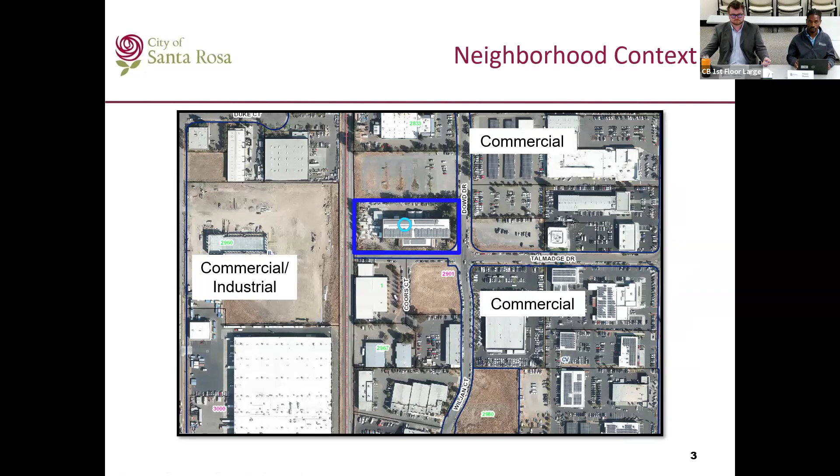Here's an aerial view of where the project will be located, and the blue box indicates where the project is. Surrounding the project is mostly commercial uses, and to the west, an industrial use. The general plan land use designation is light industry, intended for manufacturing and industrial uses, and this is consistent with the zoning land use designation of light industry, which implements the zoning district for the general plan.

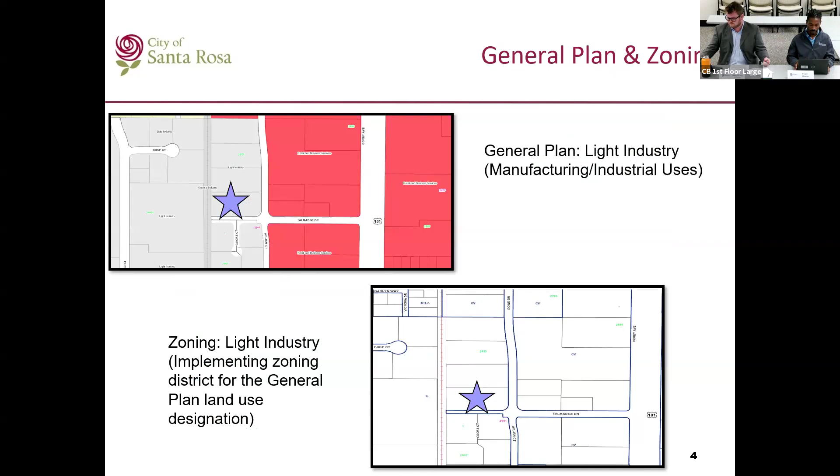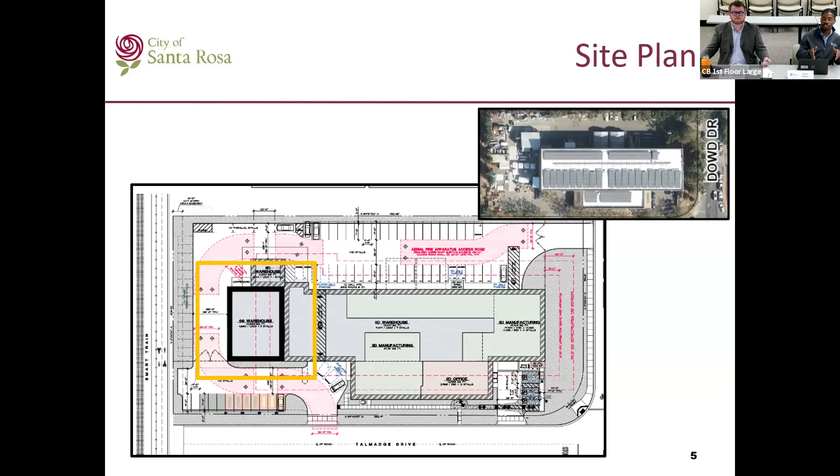Here's the site plan of the site, and to your top right is an aerial view. The addition is going to go to the left side of the building. If you look at the middle of the screen, the yellow box indicates where the addition is going to be added. This is at the rear of the facility, the elevation closest to the SMART tracks. Here are the north, south, west, and east elevations of the project, and the yellow lines indicate where the addition is going to be. The addition will match the existing colors of the existing facility.

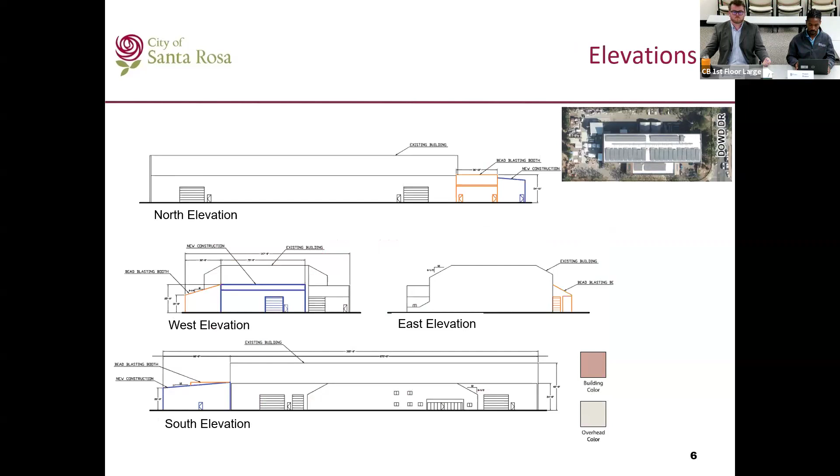This project has been reviewed in compliance with the California Environmental Quality Act and is categorically exempt because it involves minor modifications to an existing facility. At this time, there are no unresolved issues, and no public comments have been received. Staff analysis has concluded that all findings can be met, and the applicant has reviewed and accepted all conditions of approval.

Thus, it is recommended by the Planning and Economic Development Department that the zoning administrator approve a design review to allow an addition at 2899 Dowd Drive. My contact information is at the bottom left of the screen if you have any questions.

Thank you. Questions or concerns? Is the applicant present, and if so, do they wish to make any comments or presentation? The applicant is present, along with the CEO, CFO, and COO of Blendtec. We just want to acknowledge that the process has meticulously been conducted by the city planner, and he's been very express and clear on the steps to be taken. We're delighted to do them, so we're ready to proceed.

Great, thank you. With that, I'll open the public comment. If you're attending in person and would like to make a public comment on this item, please raise your hand. Zoning administrator, there are no public comments.

Great, thank you. Thank you for being here, and thank you to the planner for the presentation. The design looks good. It seems like a relatively straightforward expansion of an existing use, using existing materials and colors compatible with the industrial area. So I'll approve the project.

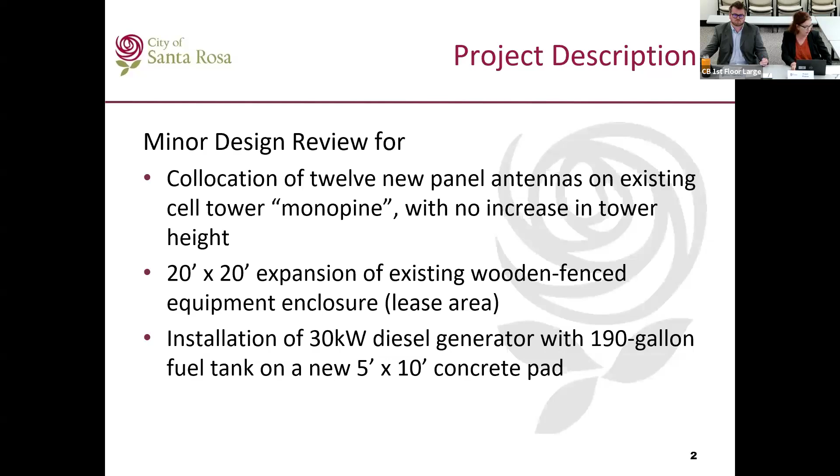So for the general plan and zoning, the site is in blue with the star. The zoning and general plan land use designation is public institutional. This allows for the clustering of public facilities such as hospitals, schools, or in this case, the Sonoma County Fairgrounds. The general plan land use designation is consistent with the zoning designation.

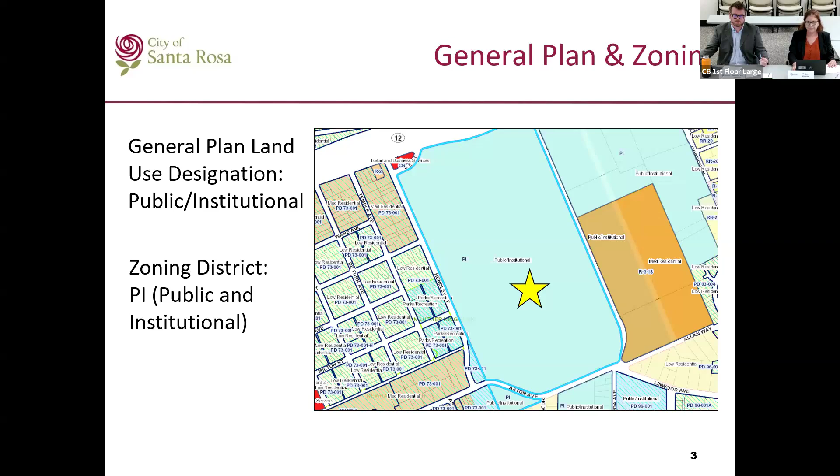Here is the fairground site. This particular parcel is 81 acres. It's bordered to the north by Highway 12 and Bennett Valley Road. To the west, it's existing low and medium density residential as well as Martin Luther King Park. To the south, you have additional parking, some other Sonoma County owned facilities, and a sliver of medium residential development. To the east, you have additional overflow, more Sonoma County facilities. Where the yellow star is on the south there, that's where the project site is. It's really south, southeast.

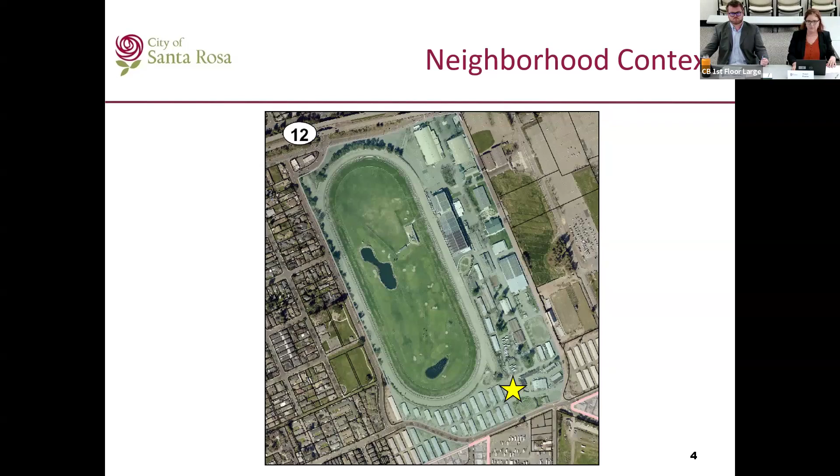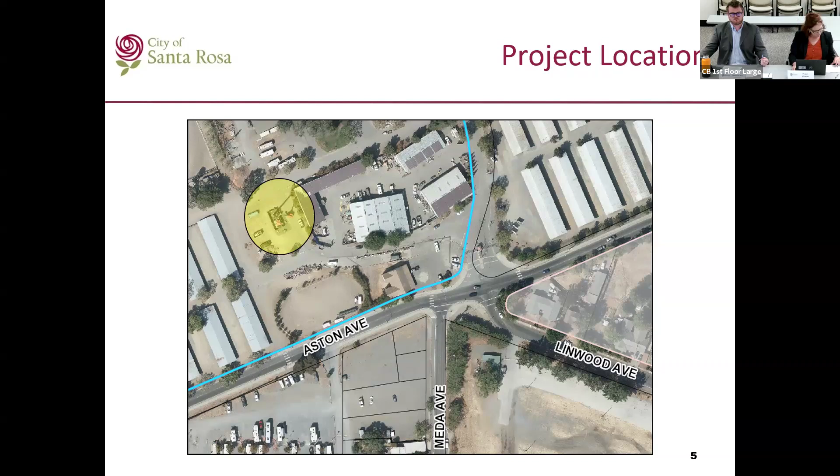Here's a further zoom in showing the existing cell tower, which has 800 square feet of lease area and a 75 foot monopine. It's served by existing roads and utilities.

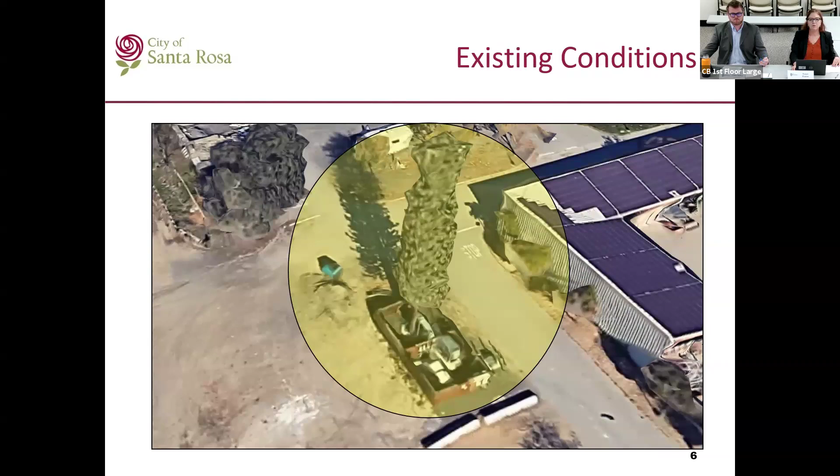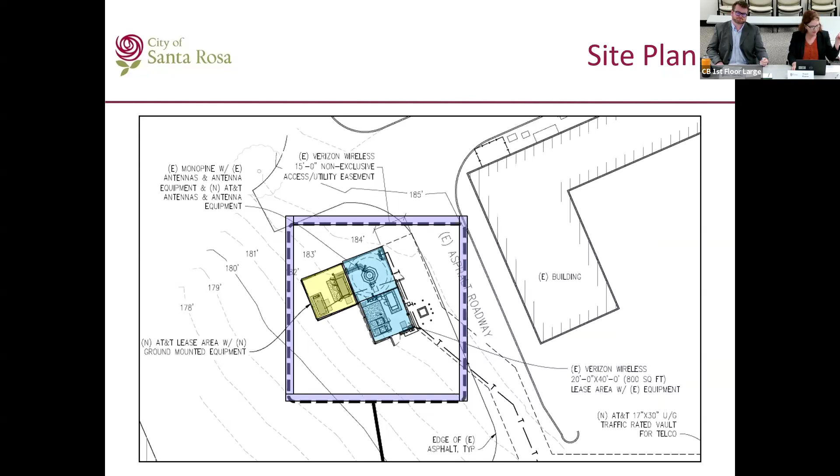Okay, so this is the site plan. I'll use colors here for you guys. Blue is the current lease area, which is 800 square feet. The second square is the cell phone tower area with the 75-foot monopine. In yellow is what's proposed, this expansion. The new lease area will match the existing 6-foot wooden fence with an additional 2-foot lattice, which shields it from public view.

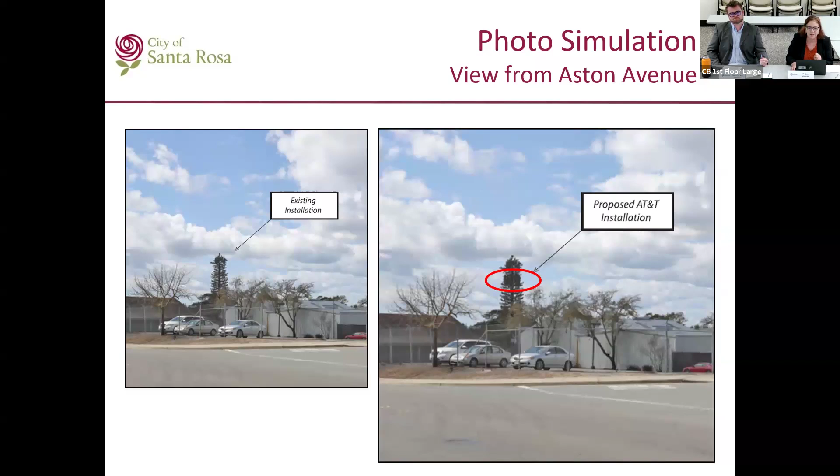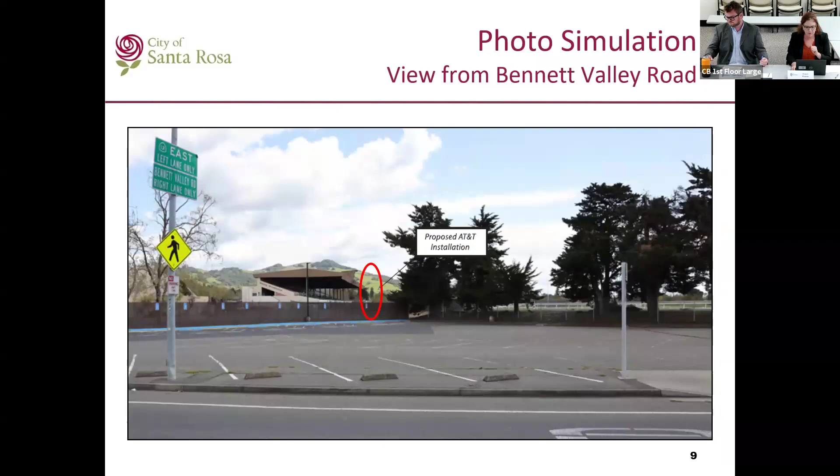Again, this is looking from Bennett Valley Road, and the circle shows you can just make out the cell phone tower, that's where the installation is. Again, this is the existing cell phone tower.

Environmental review: the project has been reviewed in compliance with the California Environmental Quality Act (CEQA). It is categorically exempt because it involves minor changes to an existing structure, and statutorily exempt because it's consistent with the general plan.

There are no unresolved issues as a result of staff review. At the time of this presentation, I had not received public comments, but I have subsequently received three: one phone call and two emails, and I'd like to address those.

I addressed them with the commenters via email as well as on the phone. The comments were regarding concerns about RF emissions in relation to the nearby horse stables, as well as concerns about impacts to the nearby residences.

I spoke with the applicant, who responded that per the electromagnetic energy compliance report included in this application packet, the maximum average RF at this site is 8.68%. This is compliant with FCC regulations for maximum permissible exposure limits.

The mitigation measure required here is that a caution sign be posted at the base of the pole, which the applicant confirms will be implemented. Additionally, the standards are for humans, but that does cover mammals as well. The applicant is also here if there are further questions on this subject.

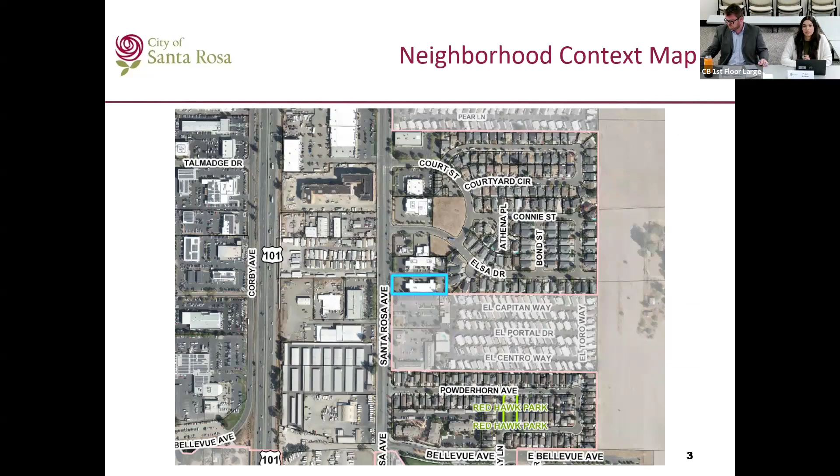Here is a neighborhood context map, so you can see the location. The project is located towards the south end of the city on Santa Rosa Avenue.

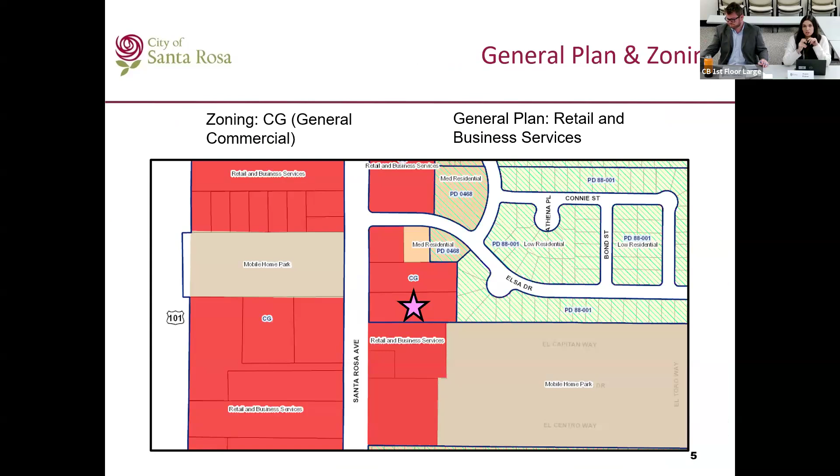The general plan land use designation is retail and business services, and the zoning district is CG, or general commercial.

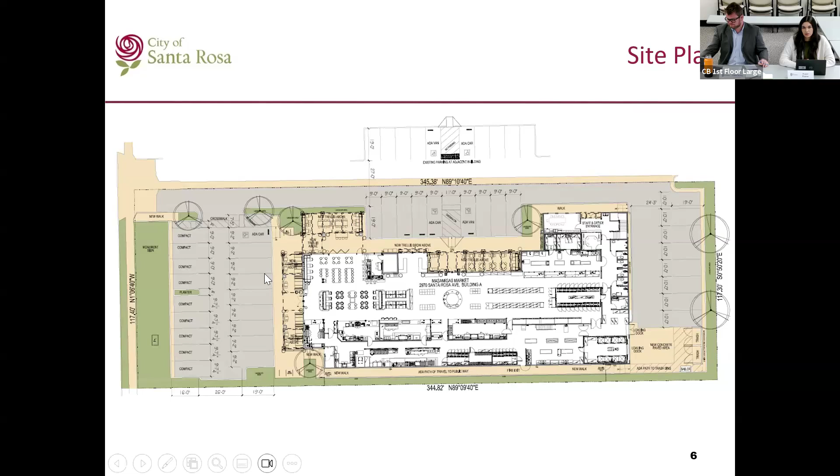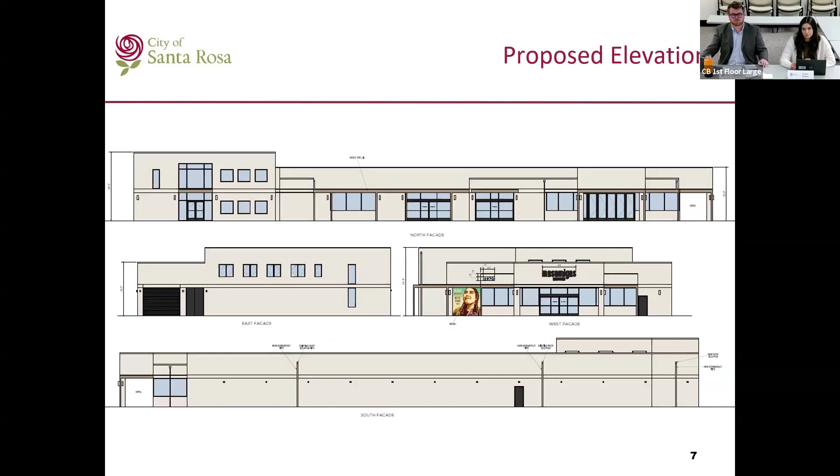Here are the proposed elevations. And here you can see a side-by-side of the existing and the proposed building. Again, the existing building is of stucco and the new building will be of a Roman clay exterior.

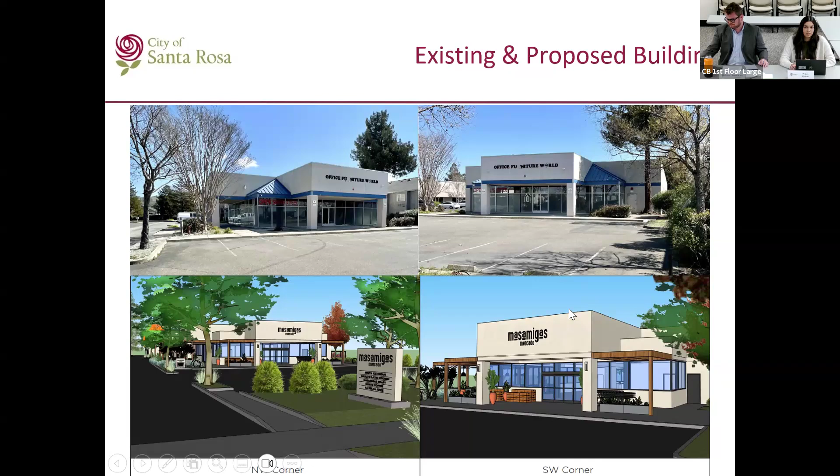And you can see that the wood trellis here will be replacing this blue roofing here. There will be updated windows. And here's another side by side so you can see another elevation, the northwest and southwest corner.

The project is categorically exempt. It consists of an addition of less than 10,000 square feet. There are public services and facilities available to the project site, and it is not environmentally sensitive. It is also consistent with the general plan and general plan environmental impact report. There's no value for endangered, rare, or threatened species. There's no significant effects to traffic, noise, air quality, water quality, and the site is served by all existing utilities and public services.

There are no unresolved issues as a result of staff review. We have not received any public comment for this project. Staff analysis has concluded that the findings can be met, and the applicant has reviewed and accepted all of the conditions of approval.

Therefore, it is recommended by the Planning and Economic Development Department that the zoning administrator approve a minor design review to allow the expansion and remodel for Mas Amigas Mercado at 2970 Santa Rosa Avenue. And for any questions or comment, my contact information is on the screen. Thank you.

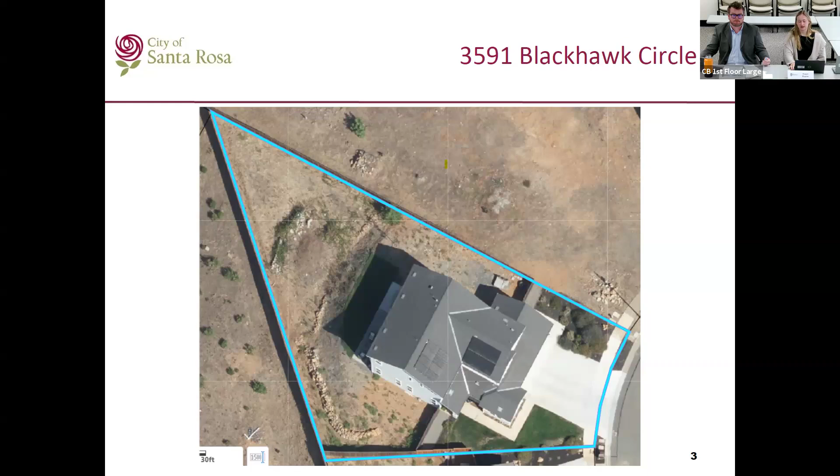This is an aerial view of the residential property, and I'll show the highlighted area where the deck is going to be proposed, but it is detached from the single family dwelling.

This is a neighborhood aerial view. It is a little bit dated. The properties directly to the west have been redeveloped, so there are single family dwellings there currently. The property directly to the east, though, is still not developed.

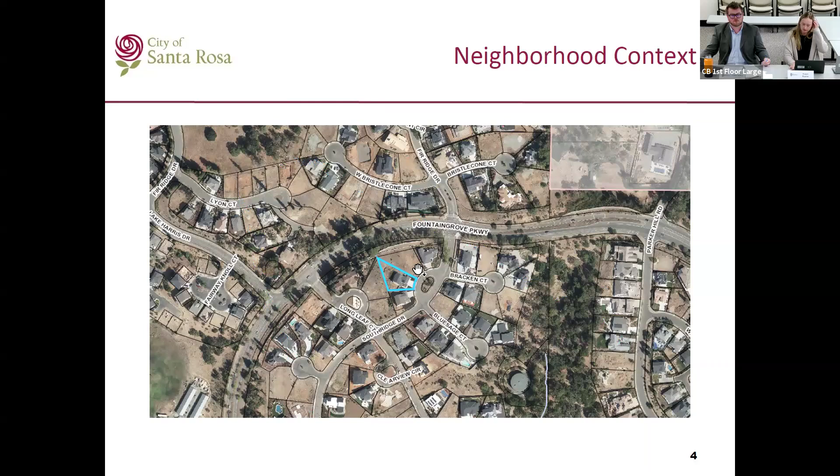The zoning district is planned development for residential developments, and the general plan land use designation is low density residential.

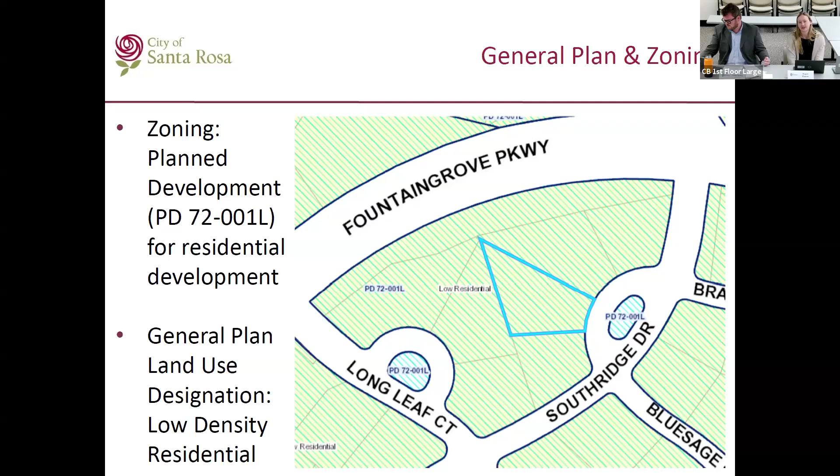This is the site plan that they provided. As you can see here, this is the existing dwelling, and then there's proposed a little strip of lawn, a little patio area, and then we have the deck here highlighted in red.

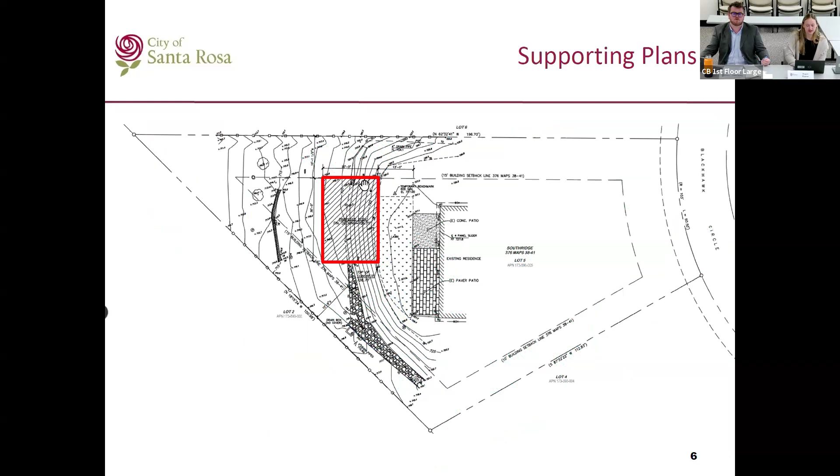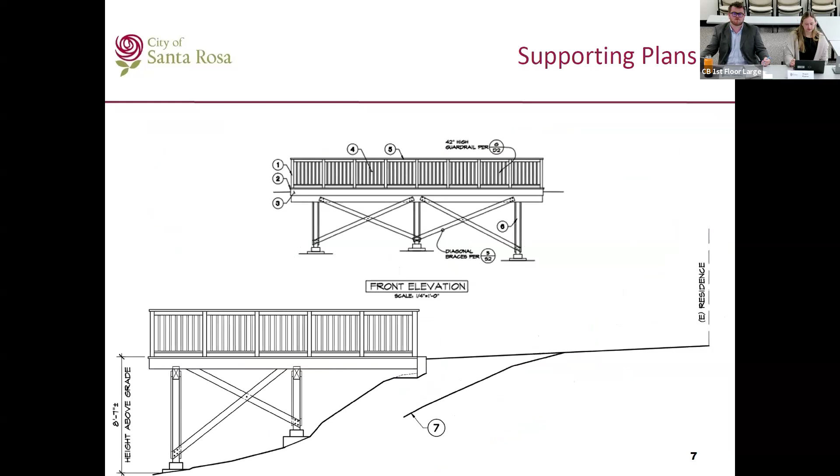And these are the elevations that the applicant provided. It was found that this project is categorically exempt because it involves construction of a small structure.

There are no unresolved issues as a result of staff review. There was a comment provided to me by a nearby neighbor, concerned about privacy as their deck seems to be in direct view of their yard.

One of the conditions of approval that I have proposed is in regards to providing some more vegetative screening, some landscaping, maybe preferably some larger trees along the property line there, just to provide a little bit extra screening and privacy with those neighbors.

The applicant did let me know the other day that they do have some crepe myrtles recently planted there. But I do think that after review, crepe myrtles don't tend to always be very large, and they don't always provide the best screening, because during the winter months they're pretty barren.

So I think it would be good to have some larger trees there that can create more of a constant screening, or even some sort of tall cypress trees is also a suggestion. We can play around with what you guys would like to go in there for landscaping.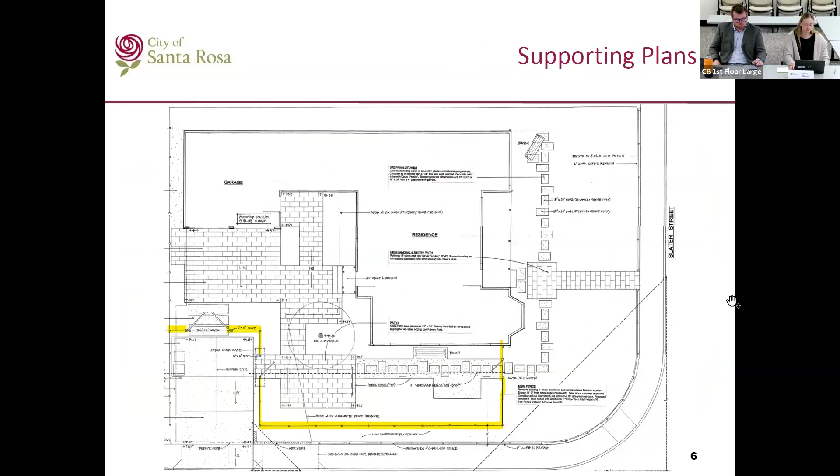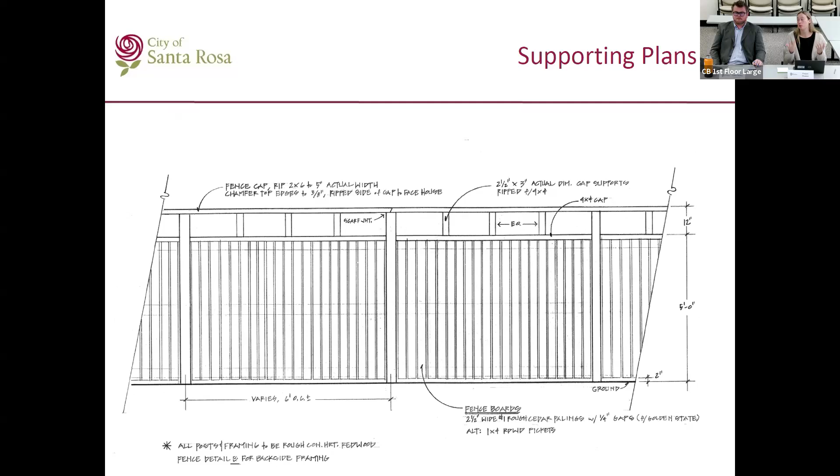This is a proposed elevation. It will be 5 feet of solid wood boards, and then the last foot is a decorative piece that's a little bit more open. The project has been found to be categorically exempt from CEQA because it involves the addition of a small accessory structure.

There have been no unresolved issues. Staff can conclude that the findings can be met, and no public comments were provided to staff. It is recommended by the Planning and Economic Development Department that the zoning administrator approve a resolution for a minor conditional use permit for the wood fence being constructed within the corner side setback at 2115 Slater Street. My contact information is on the screen here if you have any questions, and I do have the applicant present if you have any questions for the applicant.

Great, thank you. Would the applicant like to make any comments or presentation?

Yeah, I'm Brad Ebner, and I really appreciate the planning staff working with me on this. This is an improvement I've been intending to make ever since I moved into the home 7 years ago. I finally have it together to move forward, so appreciate you working with me on this. I have received an encroachment permit to move the driveway approach to the location indicated on this application, so I think I'm all set to go if this moves forward. Thanks very much.

Great, thank you for being here. Public comment? If you're attending in person and would like to make a public comment, please raise your hand. There are no public comments. Great, thank you.